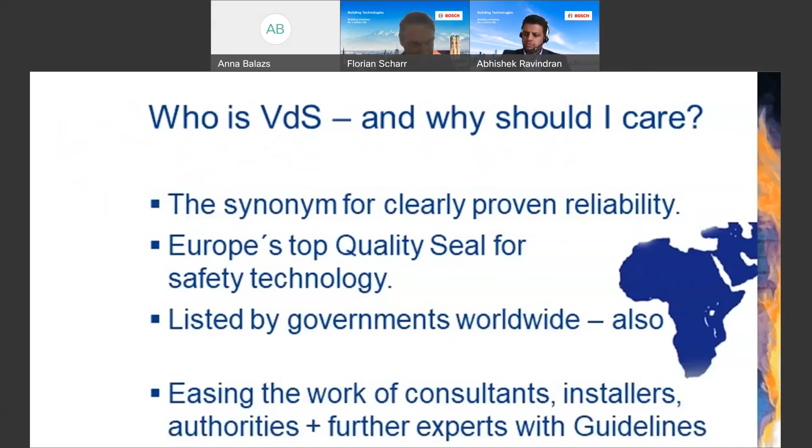VdS is answering for you the one key question for everyone involved in fire protection technology: will that safely work in an emergency? Because everything else, which specific system it is, the design, even the price, is secondary. And that core matter, being definitely proven and ensured in practice, can be seen at first glance with the VdS quality seal.

Recognized by authorities in all Middle East, Africa, and of course Turkey. You see the last point, the guidelines, quite important, I'll come to that later on. And VdS bases on the European norms. So I'll give you a little background here.

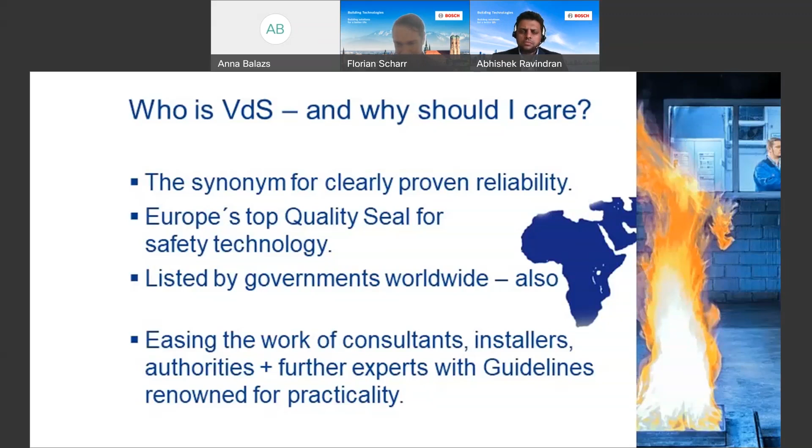In the year 1967, there was a really heavy fire at a mall in Brussels. 251 dead, a really bad number. And yeah, of course this has an impact on people. So after such heavy catastrophes there's strong, high pressure from public opinion and from the media on the politicians: hey, we're not happy waiting for the next 200 plus dead, change something.

So the politicians had experts create European safety norms. And you can see a lot of brain power is going into the standards in the next slide. Basically, the target was for test methods and performance criteria for effectiveness and reliability to be assessed and declared.

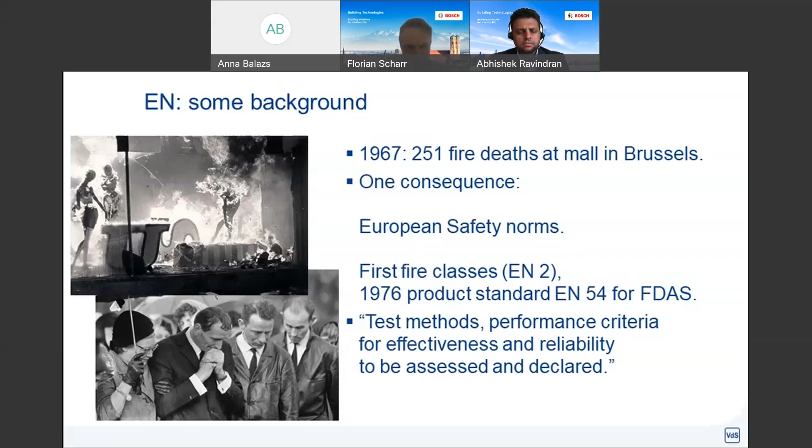Yeah, I'm going to read all of this to you now. Oh sorry, I'm just too funny. Just a little slide overview where you can see all the brain power that is going into the European norms from all European Union countries.

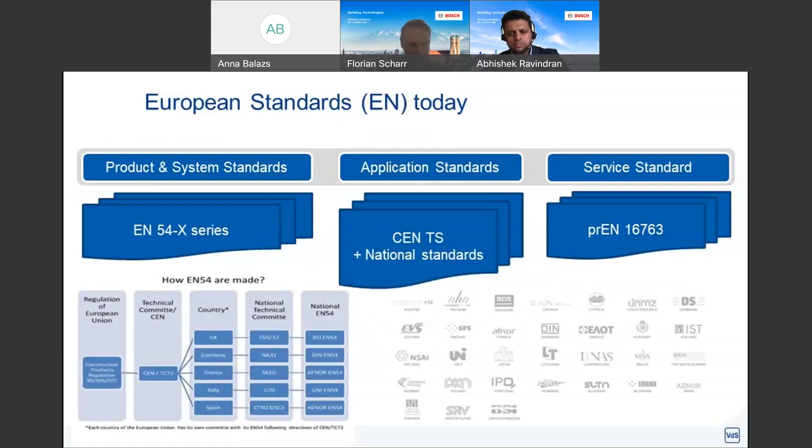Now, quite important, the comparison between the European and the UL standards for fire detection, control, and indicating equipment, the heart of what we are basically doing.

One question that often comes up on this slide is, why is almost all of it the same? Because if we have a nice idea for safety, the Americans also add that. And if they have a nice idea and it's good for safety, then we also add it, which is totally fine. I call that copying for global safety.

Now what we see, there are some differences, which I marked in red and green. Basically starting with the humidity. In many regions of your countries, we are probably way closer to 5% humidity than to the 95% from UL.

The next one, not red and green but written in bold, is the fault signal point in the middle. UL calls that a trouble signal. This is what must happen if, for example, a detector is being removed or is being trashed, which sometimes happens when the cleaning person puts their broomstick up too high and hits the detector.

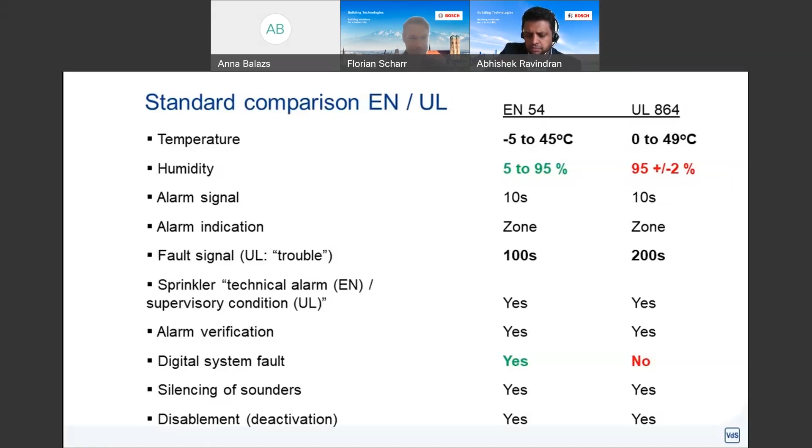Now you can say, okay, sounds good, but please give us details, give us proof. How can we be sure that VdS safely protects us?

Because we are evidencing supreme reliability by practical endurance specifications in worldwide unique German laboratory infrastructure. Same as, for example, Underwriters Laboratories, we subdivide the tests into two main parts: functional testing and environmental testing. Basically, products and systems have to prove they are effective at all times after artificial aging and under a wide range of difficult environmental conditions.

We are using artificial aerosols, real test fires, and for extinguishing systems we are even using exact replicas of the plant extinguishing environment. So basically, our job is to really badly, heavily mistreat the safety systems and then make sure they still function.

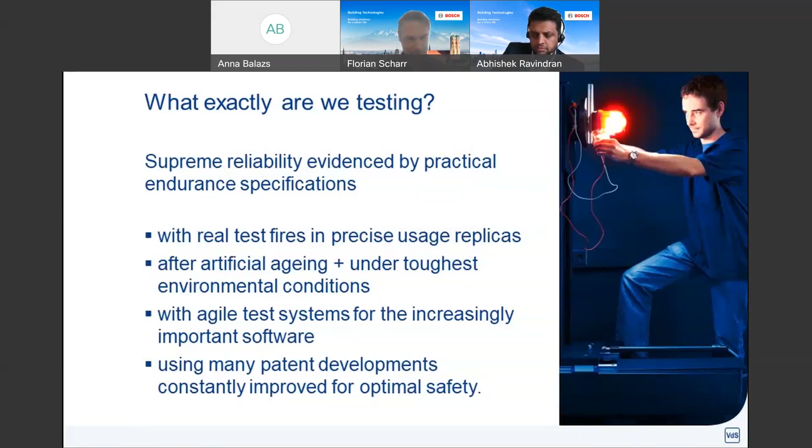Here I have directly underlined the two probably decisive points for you, because there are frequent situations that consultants, planners, installers report to us over and over again. They are to install a fire protection system, and the authorities require compliance with ISO or EN standards, which are mostly quite similar. Then maybe the operator states, hey, we are part of an American company, so our fire alarm technology must comply with NFPA requirements.

Then maybe the insurance company comes along and demands that the system must be installed according to VdS guidelines. So, okay, we must cover EN, ISO, NFPA, VdS. When this happens, like so often, those responsible, mostly you fine listeners, usually ask themselves the one very important technical question: why me? Well, hopefully we can make your work much easier here.

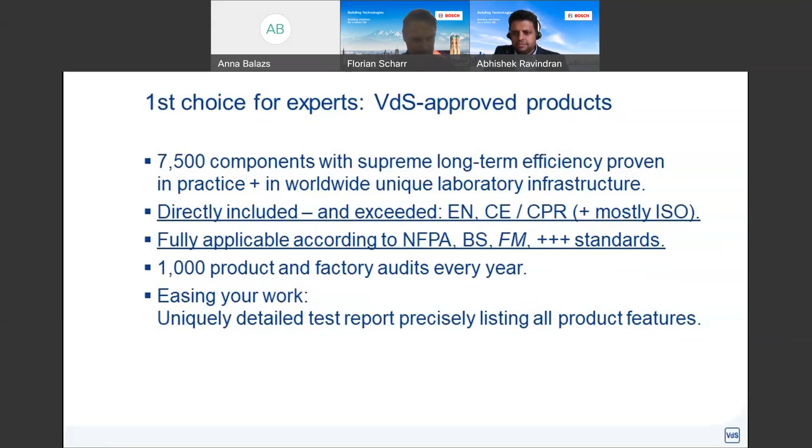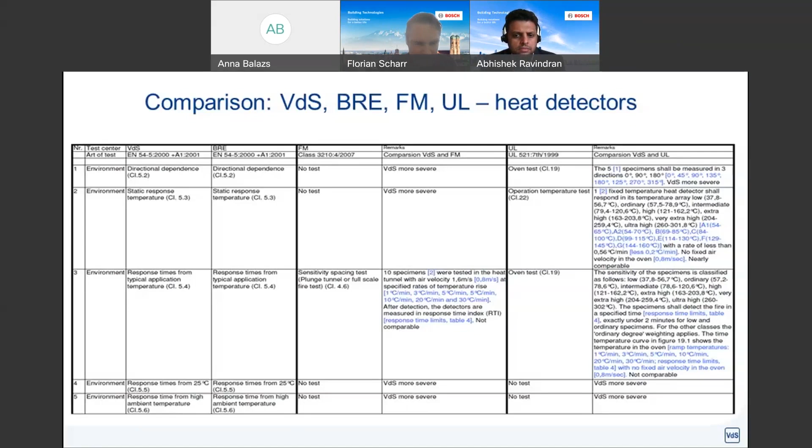This is usually insects, and this was one of the main triggers of false alarms in Germany in spring and summer when loads of insects are flying around. Many Middle East, African, and Turkish regions always have German spring and summer temperatures, so a lot of insects.

As we know, frequent false alarms make users hate the technology and make them not react if the real alarm is coming. The intrusion of bugs or other animals can be prevented by a very simple, cheap grid. I'm pretty sure that in the next version, UL will, of course, reasonably demand this.

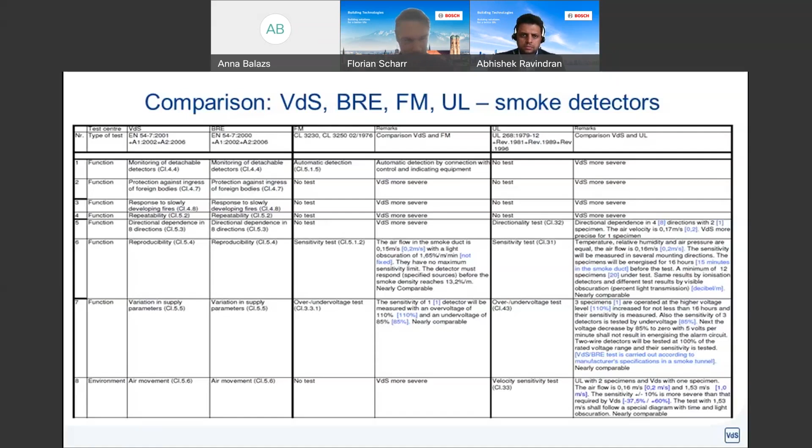Okay, we've had so many small and tight numbers and letters now, so I'm giving you some happy pictures.

Now we have a little system comparison between the American and European approach. What UL is doing is product testing, testing each single product: is it working in combination with the control and indicating equipment? And then they have the NFPA guidelines.

Same for the European norms, product testing. We also have our own planning and installation guidelines, also VdS with add-ons for optimal safety and precision. But one core, very important difference, is the system testing.

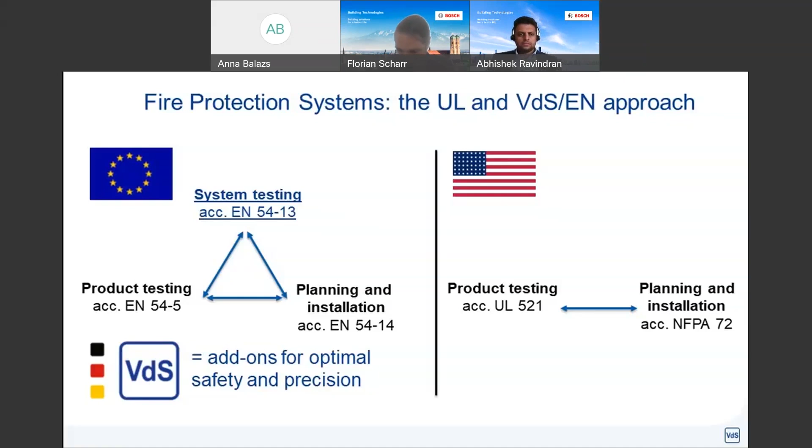Now, this is an important assurance for you and a unique selling point for VdS, the system approval.

Each of us knows this case: we do have a system, let's say 100 parts are installed in there. 99 of those parts are working totally perfect, but one part is scrap. Then there is a pretty good chance that the entire system will not work, cannot save anyone, cannot protect any building. With VdS approved technology, this cannot happen, because we always ensure the safe functioning of all components in their interaction as a system.

So we may always make sure the system definitely works in its entirety, also at full capacity, like power for the fire detection alarm systems or the highest water pressure for extinguishers. That's why our approach is called the all-round carefree package by governments, consultants, and other fire protection experts around the entire world.

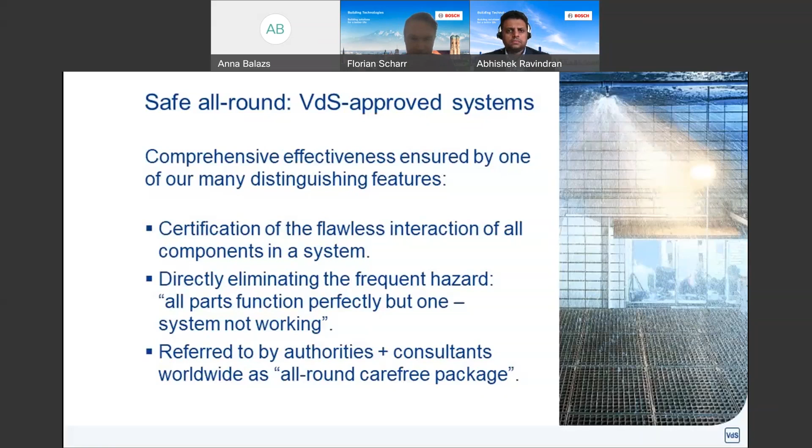What they demand is a regular monitoring of products, which is of course done by VdS and any EN institute, because it's important, because we want you to get the same quality in the market as we have tested in the laboratories. That's why we are also doing tests in the factory plants.

And NFPA wants a competent organization accepted by authorities having jurisdiction. Yes, VdS is #1 in Europe and is accepted by authorities all over the world, including, of course, Northern African countries, Turkish, United Arab Emirates, anywhere.

So products approved by VdS, which are always also certified in accordance with the EN54 series, can be used anytime in NFPA 72 installations. And also, if some of you are also doing gas, NFPA 2001 is also covered.

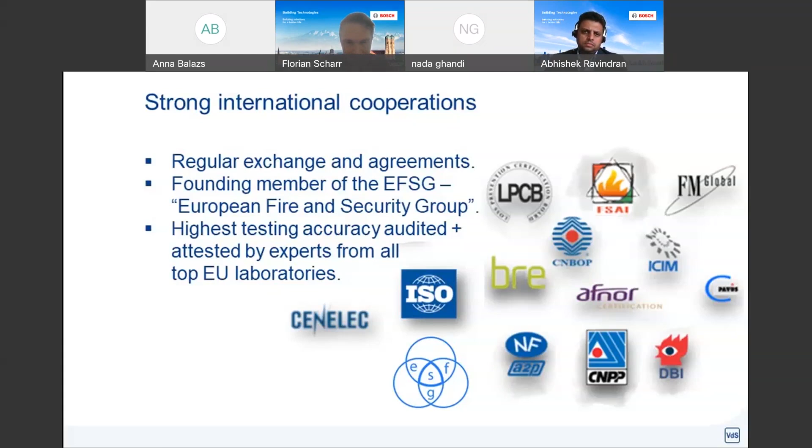Now, one more important plus point for you, could be important for your work.

A very big player in the safety markets are the insurers. So when you're dealing with them, it should be helpful to mention that VdS was founded as the official sprinkler testing laboratory of the German insurers, right when this technology first arrived in Europe. Why only sprinklers? Because in 1908 that was the only safety technology existing. And then we added more - we've been testing every safety technology used in Europe ever since it was first used, which should give you some real important backup.

We are still 100% owned by the German Insurer Association, with members like Allianz and Munich Re, who are also quite active in your regions. Since the German insurers pay every year in Germany only 2 billion euros for fire damage, they keep a very close eye on fully reliable safety technology.

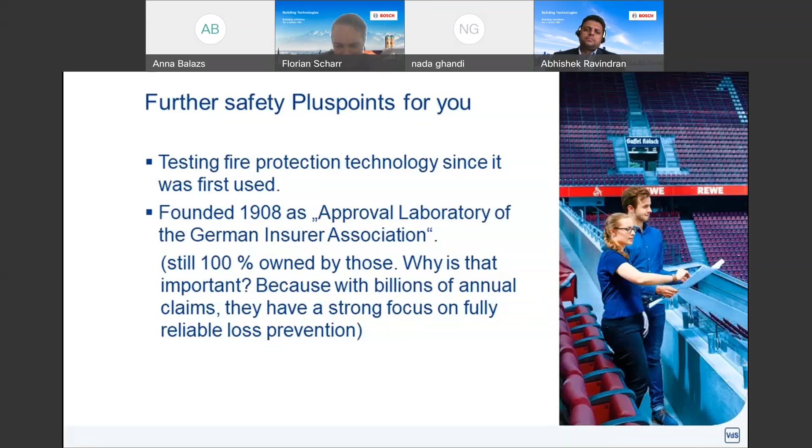Now we have the guidelines. We were quite happy when Safety and Construction Press referred to our guidelines as technical holy books. They always cover the EN standards and are preferred worldwide for highest precision and usability. Quite often, if an EN or ISO standard is coming up, it is based on a VdS guideline that has been published years ago.

If you want to check out some of them, you just go into the search engine or go to basically VdS shop de/en - the problem is, why is that in italic? They're currently doing an update there, so I'm terribly sorry to say the shop isn't online yet. It will be in a few days.

There are more than 700 publications, most of them for free download. Basically, if you're interested in any of our publications, just write me an email - you'll get my mail address in the last slide - and then I can send the publication over to you, the guideline.

Also, especially for those of you who are planning and installing fire detection and alarm systems, I've added some info from our planning and installation guidelines. Too much for this presentation now, but as I said, you'll get the PowerPoint afterwards, and this will hopefully be supportive for your important daily work.

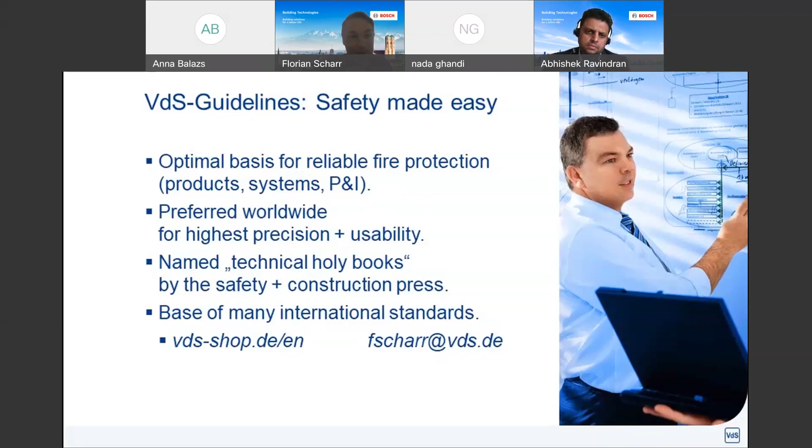First, some things we say on a choice of detector, a quite frequent question.

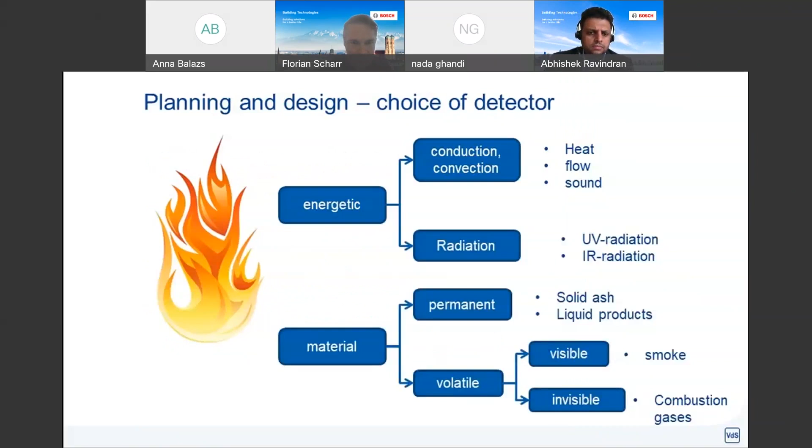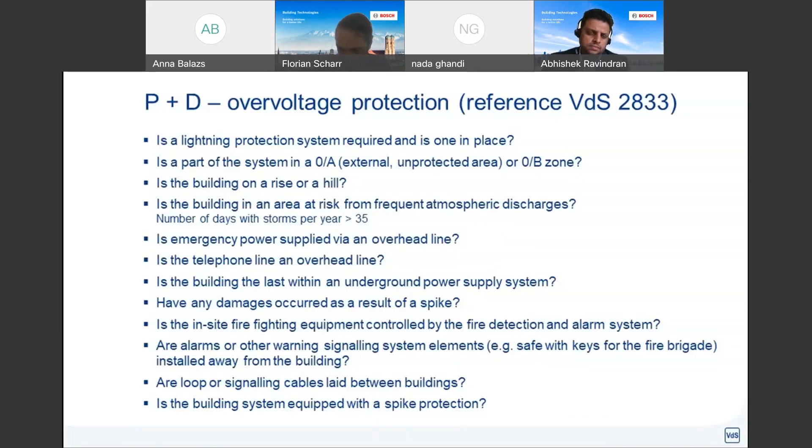The one core question when it comes to fire protection technology is always, does the whole thing really safely work? The mission of VdS is to answer exactly this core question for you. You can take off this highly important point and concentrate on all the other difficult planning and consulting issues you need to focus on. We take this very important duty off your back, because you will know long-term reliability made visible at first sight.

Finished. Shukran. I hope this was useful to you, to our joint cause of protecting human lives and costly properties and the environment. If you like, check the VdS LinkedIn channel for all guideline news. It was a pleasure, and now I'll give over to the Bosch partners. If you have any questions, use the Q&A box, or just write me an email, I'm on for this.

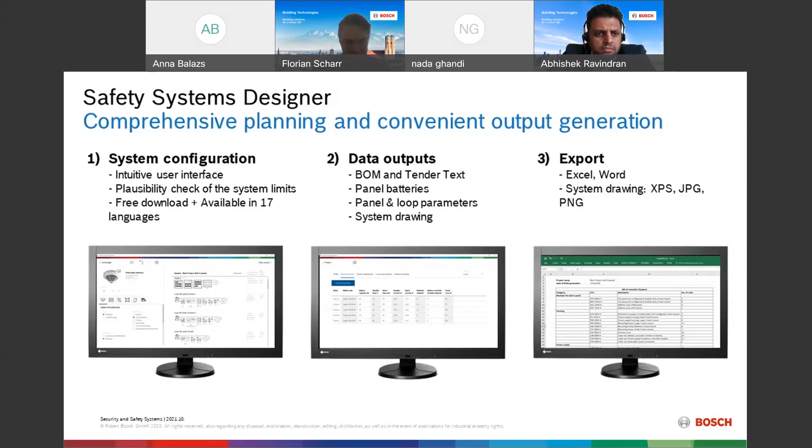Okay. No. Can you see it now? So here, actually, you can see, yes.

So this is a kind of 20 minute tutorial that will take you through the safety systems designer and show you exactly how to use it in case you need it. I have seen people who have never worked with fire who could perfectly understand what the user interface wanted to say to them, so it's really intuitive. Of course, in case of any questions, you can still come back to us.

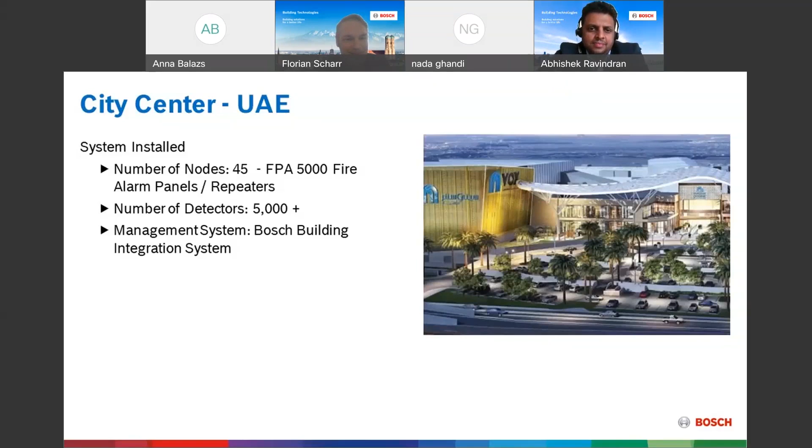And somebody is asking - waiting for Nada, I see a question here. Is VdS also accepted in Saudi Arabia? Yes, full acceptance in Saudi Arabia also.

Somebody is asking if the Safety Systems Designer is specific to Bosch products only. Yes.

Abhishek, could you please answer the question from Pakistan? Yeah, thank you. This is a good question. Of course, the Bosch products have been detailed in the system design software, where you will find the Bosch products. But if you wanted to design a system where you know the number of detectors, the number of signaling devices, the number of interface devices, with the new release, mostly this month, you will get a new release where you can simply put in an Excel sheet. Of course, we have a very specific format and it's possible.